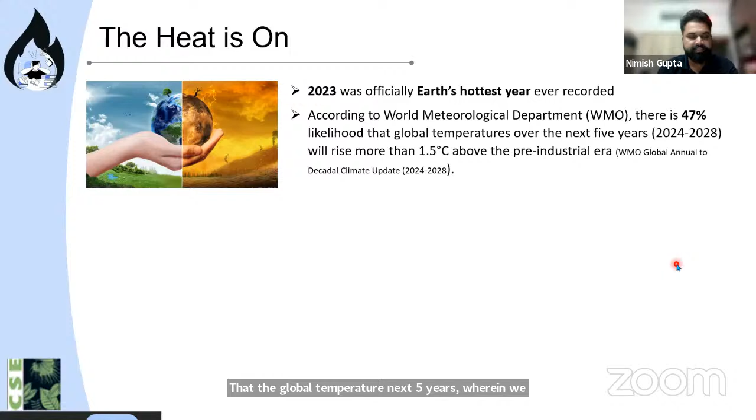Now, according to the World Meteorological Department, there is a 47% likelihood that the global temperature over the next 5 years, considering the current year as well, will actually rise more than 1.5 degrees Celsius above the pre-industrial era. And the heat waves we have been experiencing have been more frequent these days, plus the intensity has increased. So after 2030, it is estimated that around 160 to 200 million Indians would be exposed to extreme heat every year.

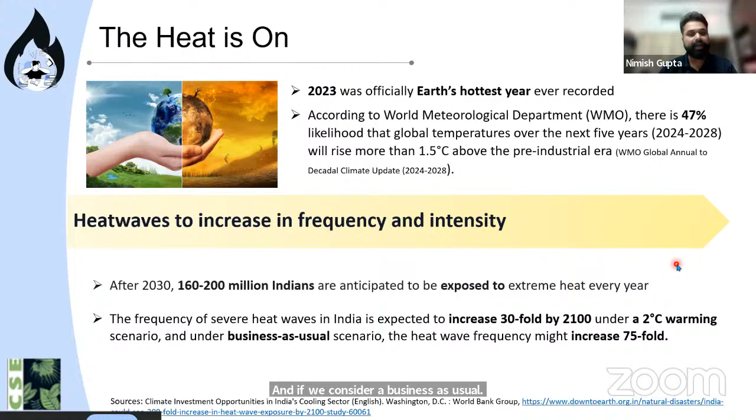And the frequency of these severe heat waves in India is expected to increase by around 30 folds by the year 2100 if a 2-degree warming scenario occurs. And if we consider a business-as-usual scenario, the heat wave frequency might increase by 75 folds. Now, extreme heat is actually here to stay.

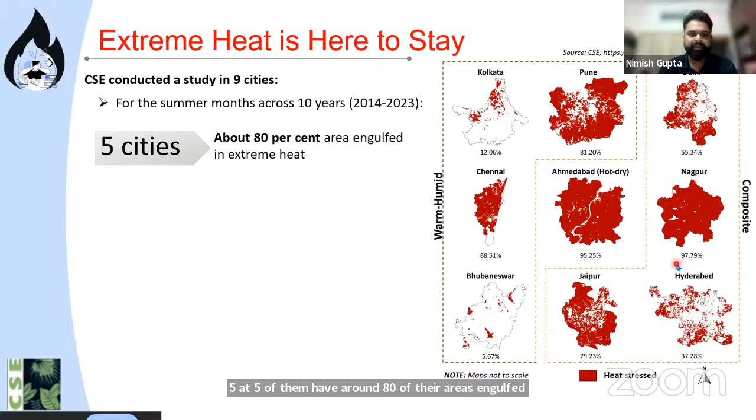So CSE actually conducted a 9-cities analysis wherein we considered the summer months for the past 10 years. What we understood is that out of these 9 cities, five of them have around 80% of their areas engulfed under extreme heat. With these areas identified, we looked at the number of schools in each of these cities: Delhi has 5,691 schools, Jaipur has 9,247 schools, and Kolkata has 6,229 schools. Most of these schools would definitely lie amongst these heat-stressed areas, and the number of students affected or under heat stress are also in millions.

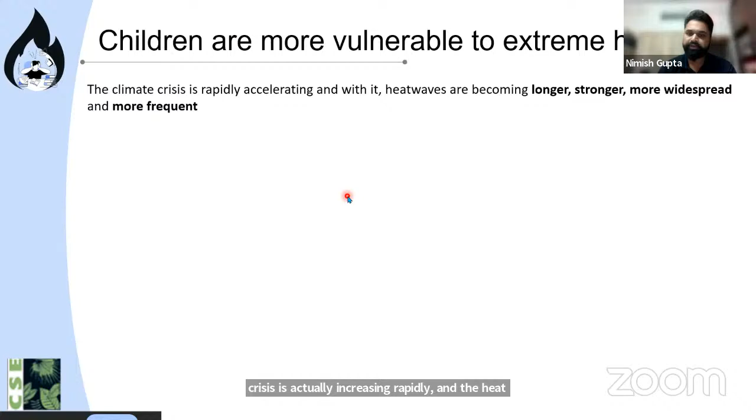So this actually impacts the health and well-being of these students. Now, children are more vulnerable. The climate crisis is increasing rapidly, and heat waves have now become longer, stronger, more widespread, and more frequent. When we talk about UNICEF's definition, a heat wave is a period wherein 3 days or more experience maximum temperature each day in the top 10% of the 15-day average. These definitions actually vary across different organizations. In India, it's something different, which I'll talk about in later slides.

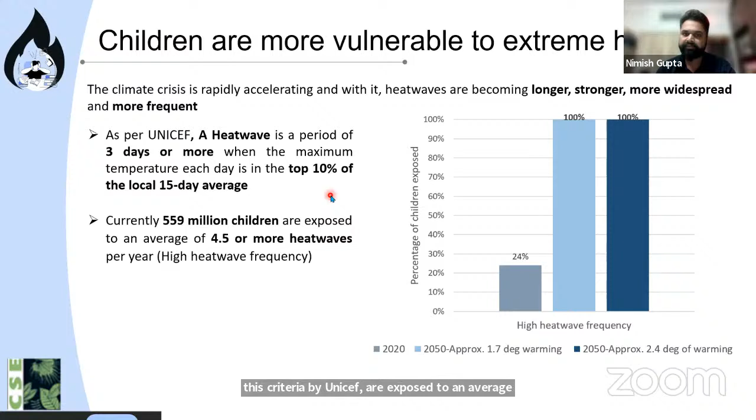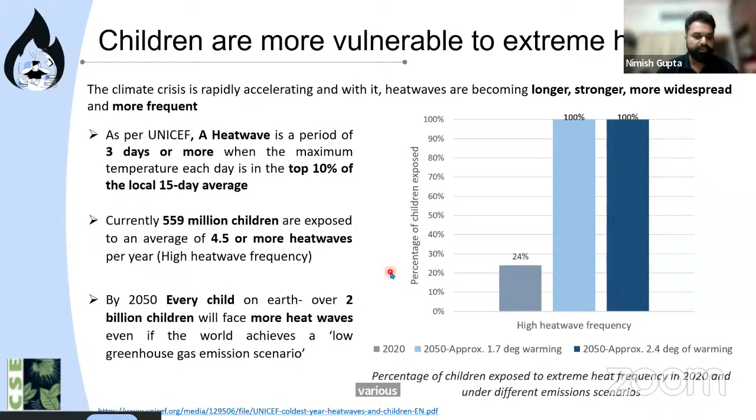So at present, around 559 million children, based on this UNICEF criteria, are exposed to an average of 4.5 or more heatwaves per year. And it is expected that by 2050, in any scenario—whether 1.7 degree warming or 2.4 degree warming—almost 100% of children, which is around 2 billion children, will face more and more heat, even in the low greenhouse gas emission scenario, as we mentioned.

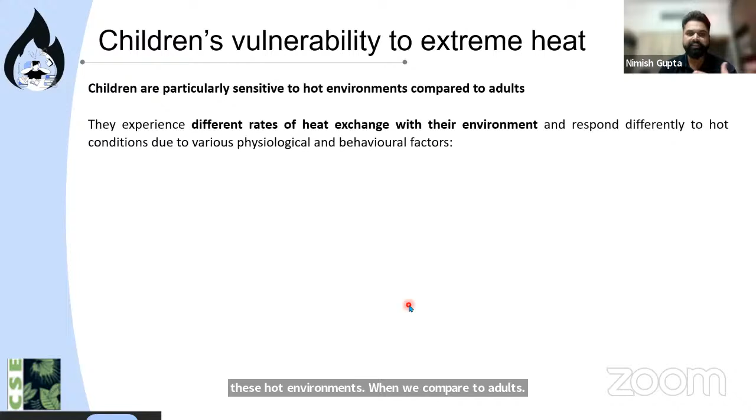Children are actually very sensitive to these hot environments when we compare to adults, as they have different rate of heat exchange with the environment, and they respond very differently to hot conditions due to their physiological as well as their behavioral factors.

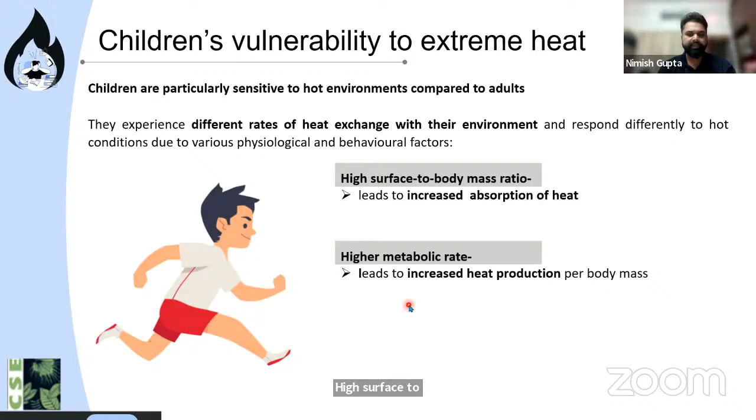Some of the factors are high surface to body mass ratio, which leads to increased absorption of heat. Their metabolic rate is higher, which results in increased production of heat per body mass, and inferior thermoregulation. Their sweat glands are underdeveloped at that point of time, and they have lower sweat rate, so they cannot regulate body temperature, which results in lower evaporative heat exchange.

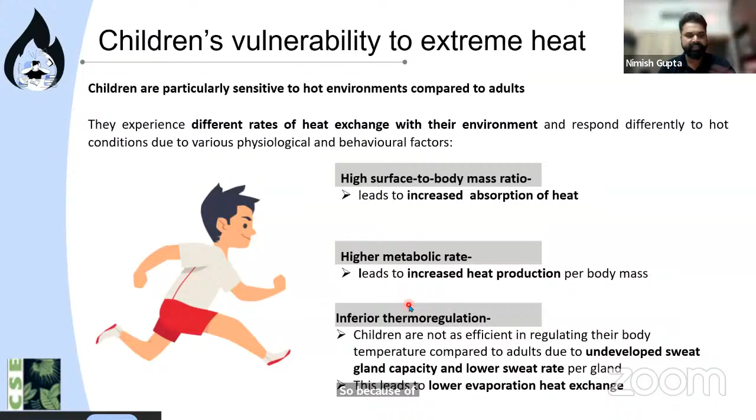The height of children is closer to the ground, which makes them more susceptible to thermal impact of surface temperatures. In terms of skin, children's skin is more sensitive compared to adults, which makes them more vulnerable to direct exposure to sun.

In terms of physical activity, children are more engaged in all physical activities, like playing sports or running around the fields and different sports, which results in higher metabolic heat production.

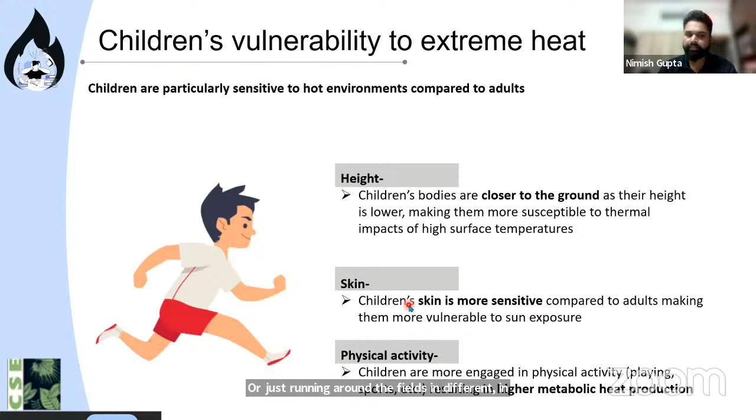A prolonged exposure may put children at greater risk, and failure to remove this excess heat could affect them in terms of health as well as behavior. In terms of health, they can face dehydration, high body temperatures, rapid heartbeat, cramps, severe headaches. In terms of learning, they have slower cognitive function and impaired concentration.

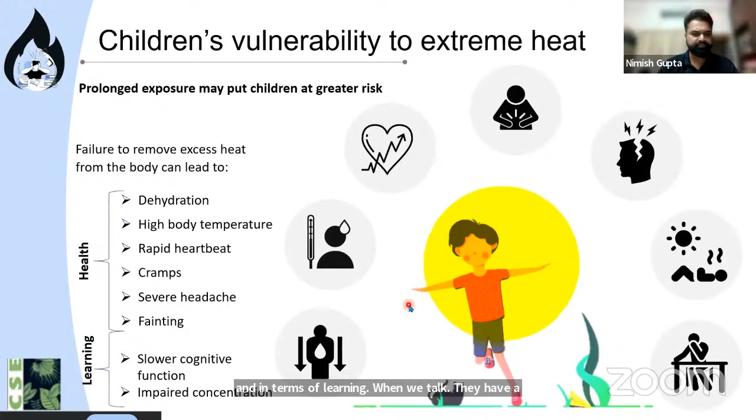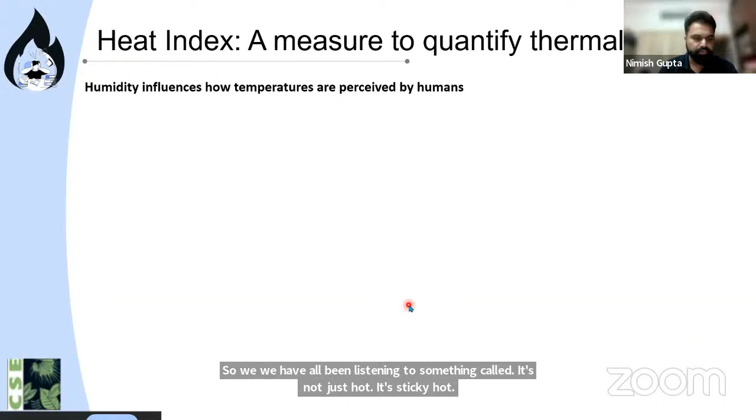There is another way where it's not just the temperature, it's the humidity as well. We have all been listening to the phrase 'it's not just hot, it's sticky hot,' which means that humidity plays a crucial role in defining thermal comfort.

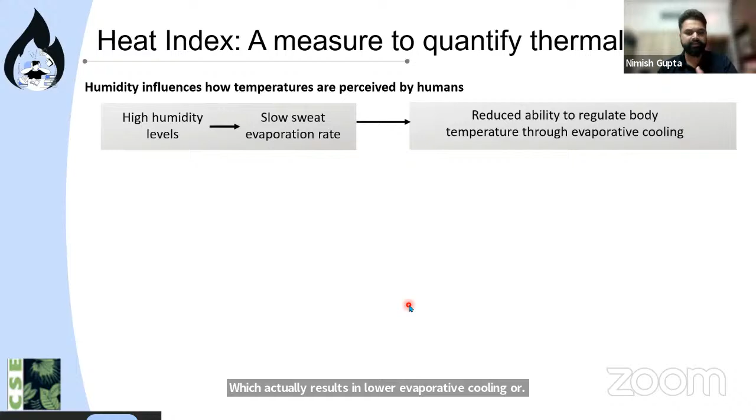When we have higher humidity levels, the atmosphere around us is saturated with water vapor, which doesn't allow our skin to sweat, resulting in lower evaporative cooling, and we start having thermal discomfort. The heat index integrates air temperature and relative humidity to estimate the human perceived equivalent temperature.

On your mobile phones, you must have seen that the temperature is 35 degrees Celsius, but you see another term called real feel temperature. That real feel temperature incorporates a couple more parameters, like humidity and wind speed, and tells you what the temperature is actually perceived as.

These are different heat ranges which correspond to various cautions provided to humans. So 27 to 32 is caution, then extreme caution, danger, and extreme danger. With each category, the health impacts become worse.

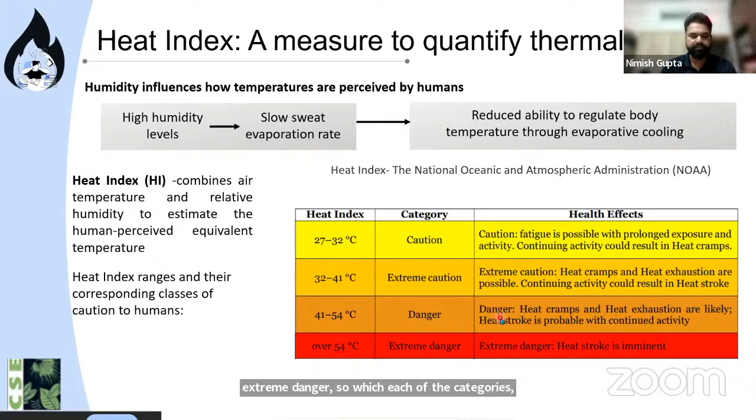CSE analyzed this heat index particularly for Delhi and other cities. I'm just presenting it for Delhi. We have done a 10-year analysis for the summer months, basically from May to September. Out of these, May to June are usually the vacation months, and July to September are the working months.

Overall, for summarization, nearly every year there were at least 10 days per month classified as extreme caution days. The number of extreme caution days over July, August, and September varied from 42 to 70 days per year for the 10-year analysis.

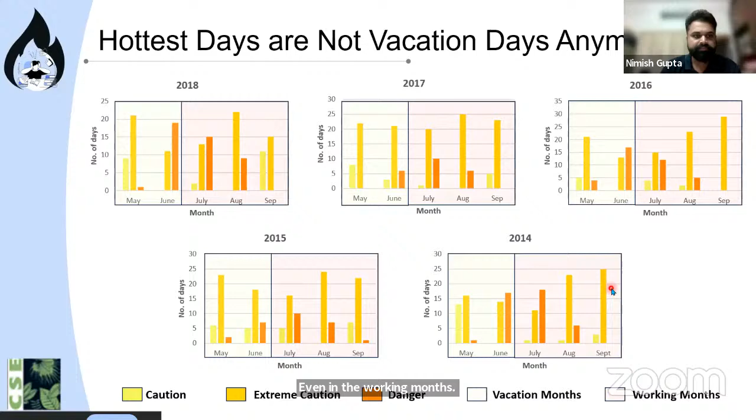Now, what CSE has identified, as Sugit told, we have identified multiple stages of discomfort at school. This could be while commuting from home to school, at school, in the classroom, and when commuting back from school to home. We'll go through these categories one by one and understand the probable impacts of heat.

The first one is in terms of commute. Seven different schools from Delhi NCR were selected by CSE to investigate the issue of heat. There is a criteria where if the home is within a 10-kilometer radius, that particular student's profile would be rated or given higher points when getting selected for that school, particularly in the admission criteria.

So what we did is we considered these schools, and a 10-kilometer buffer from these schools, and we assume that the average trip length, from where the bus picks up the first student to reaching school, is approximately one hour, or maybe slightly less or slightly more.

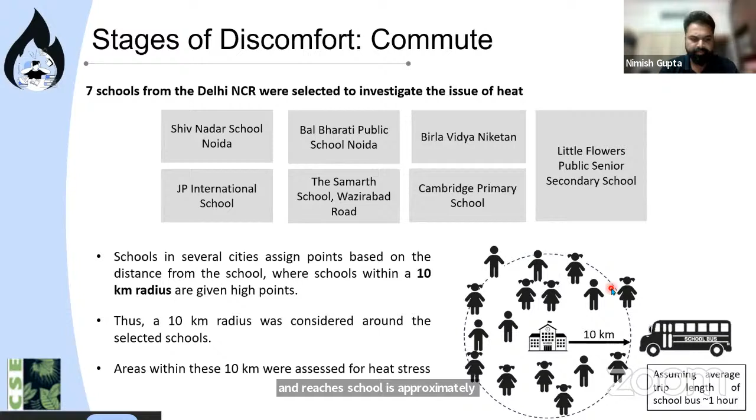So how did we identify this? We took surface temperatures for various years, like 10 years, from satellite data, and extracted the built-up area from land use maps. Then we took areas wherein the temperatures were more than 45 degrees Celsius. The surface temperature, please mind, not the air temperature - surface temperature is what you feel when you touch the surface.

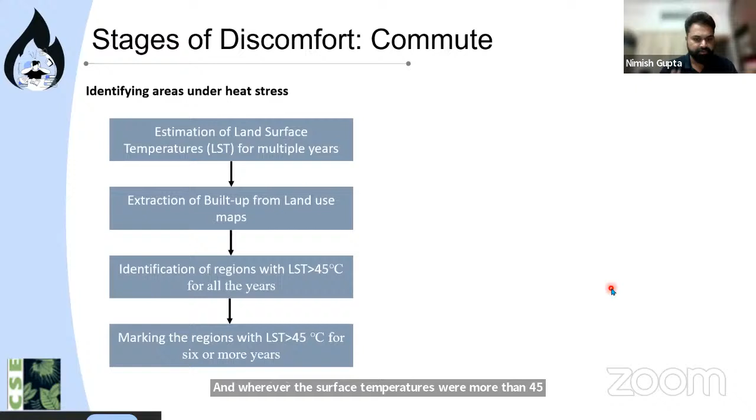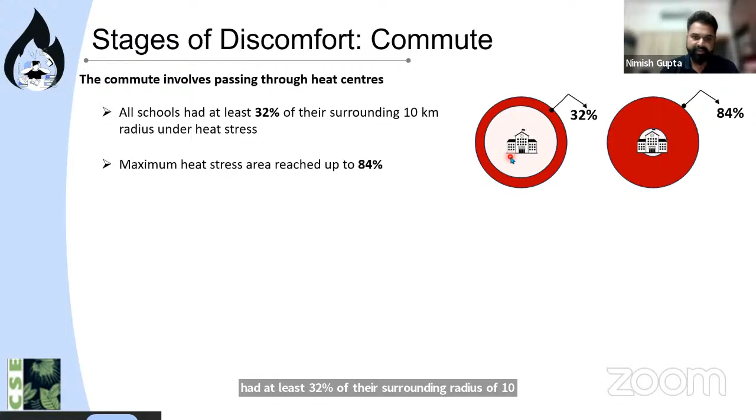Wherever the surface temperatures were more than 45 degrees Celsius recurrently for 6 or more years out of the 10-year analysis, those pixels were identified as heat stressed areas. This analysis was performed for these 7 schools, and it was identified that all of the schools had at least 32% of their surrounding 10 kilometer radius under heat stress, going up to 84% in the maximum heat stressed areas.

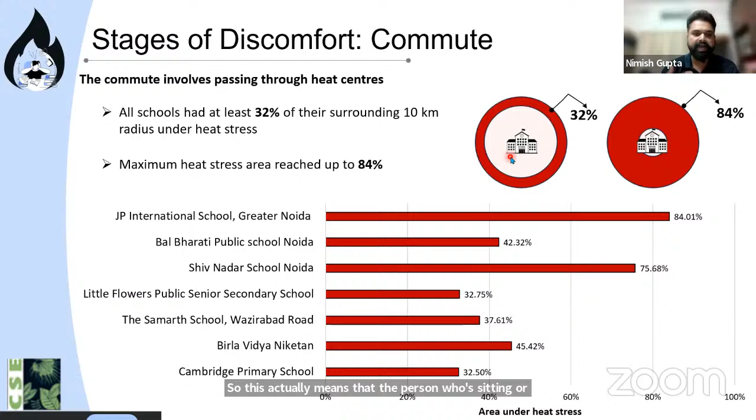This means that the first student who gets into the bus would be experiencing higher and higher heat throughout their journey.

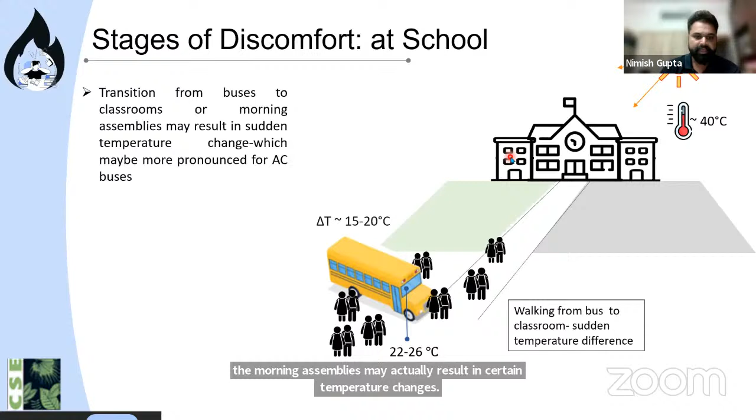Now the other stage is at the school. The transition from bus to classroom, or from morning assemblies, may result in sudden temperature changes, which may be more pronounced when using air conditioned buses. This could be a difference of 15 to 20 degrees, creating a phenomenon called thermal shock.

Some of the issues related to thermal shock are prickly heat, heat related swellings, heat cramps, exhaustion, heat stroke, nauseous feeling, and vomiting. These are some of the issues caused because of thermal shock.

In other outdoor activities such as morning assemblies, there is direct sun exposure. We keep hearing that many students faint during morning assemblies in summers. Also, during play period, if they move from AC classrooms to outdoors, or even from non-AC classrooms to more sun-exposed outdoor areas, it again creates a problem.

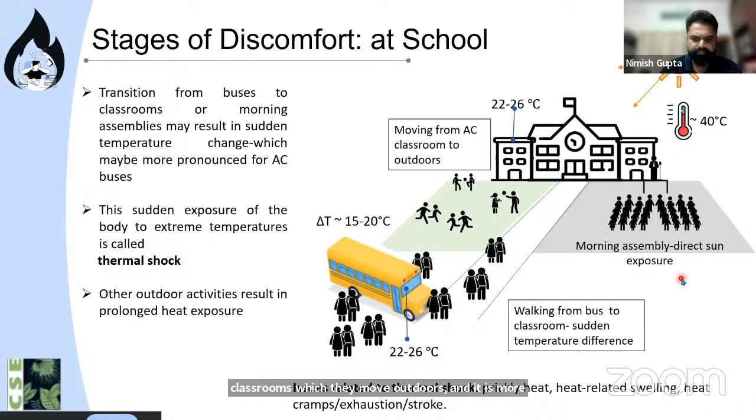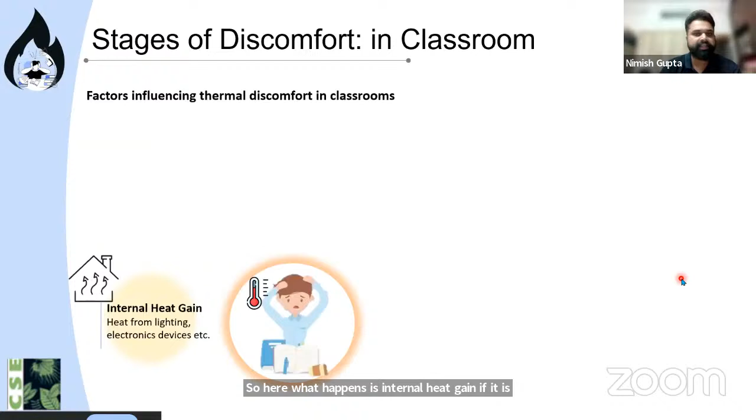Then another discomfort stage is in the classroom. Here, internal heat gain can be higher in terms of heat from lighting or various electronic devices. There's also external heat gain, wherein the building absorbs heat during the day and keeps increasing the inside temperature if the design is not adequate.

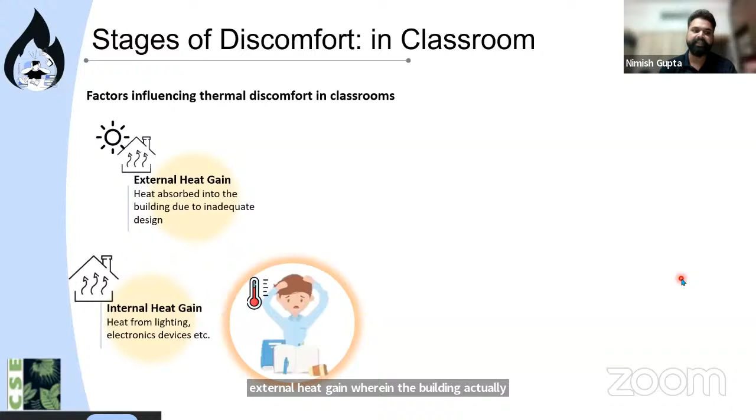If student density is higher, the ambient temperature and humidity level start increasing and it starts to feel more uncomfortable. Consider yourself in a room that is more congested with people - we start feeling discomfort in terms of breathing as well as temperature.

Inadequate ventilation leads to poor air quality, with continuous emission of CO2 from humans as well - it also creates an issue.

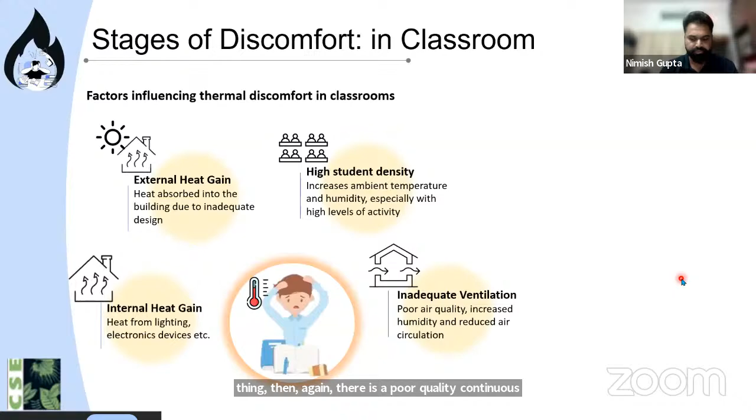According to National Education Policy 2020, classrooms must maintain an optimal student to classroom ratio, which varies with different areas, climatic conditions, and classroom size. As per the Unified District Information System for Education (UDISE) 2023, around 70,000 government schools across India have a slightly higher student-classroom ratio.

The accumulated heat in the classroom needs to be flushed out through adequate ventilation, in terms of electric fans - Sugit will be talking more about the solution criteria for these discomforts. Also, 15% of government schools in India do not have functional electricity connections, which creates even more issues.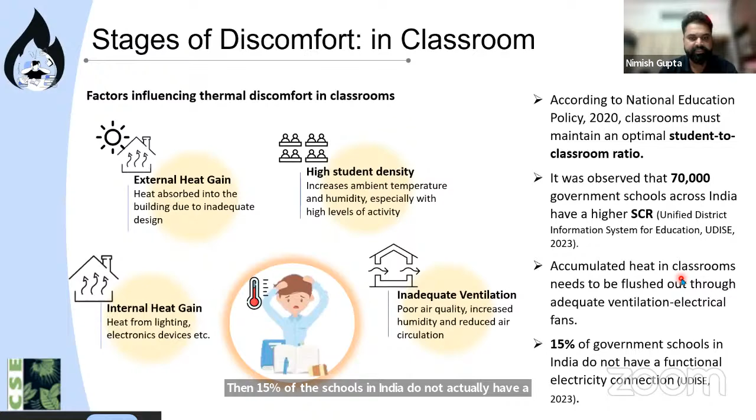There was an analysis based on a questionnaire filled by teachers across various Indian cities. Around 7 Indian cities were considered, and more than 300 teachers filled this form. They observed that 67% of students actually returned home earlier - at least around 10 students per week returned home earlier due to heat-related illnesses.

Teachers reported that fatigue was one of the most common heat-related issues noticed in students, followed by restlessness and dehydration. Students were also observed to be slower in work and were distracted in the classroom because of this heat.

Further, most of the teachers actually reported that tiredness and heavy sweating was the most common complaint from the students while they were in class, and a significant number of students also exhibited fainting, weakness, as well as headache.

So now I would request Miss Priti Arun. She's from Cambridge School, based in New Friends Colony, New Delhi. Ma'am, would you please share some impacts or examples of what you're actually facing in your school?

Thank you, Nimish. In terms of the discomforts that students are facing, it totally coincides with what you have spoken about. I think when Sugeet is talking about the solutions, that's the time when I can probably contribute a little more. But right now, the idea is that there are very few fans. Even if there are about 4 fans in every classroom, the effect of the fan is not felt very much by every student in the class. So these kind of things are there, and of course the classrooms are not air conditioned. Even if they were air conditioned, I don't know how much it would help in dead dry heat. So I think most of the schools would agree with what you have shown over here. So over to you, Sugeet.

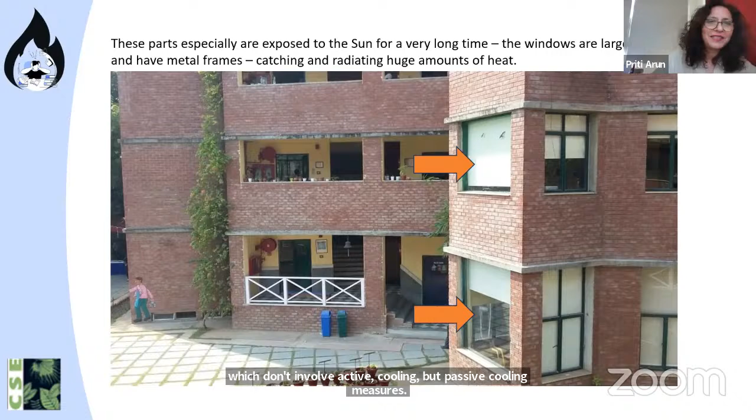So over to you, Sugeet. If there's anything I can speak later, it would be great, but right now I think you would be best. Sure, thanks a lot, Ms. Priti, for sharing what's happening in schools and the kind of issues and tough decisions that schools have to make now.

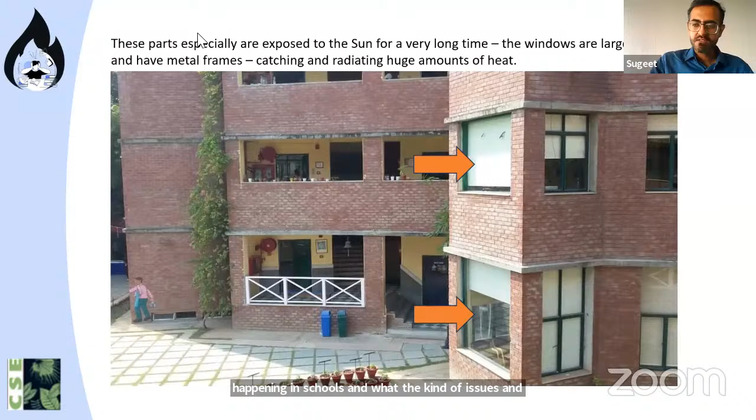So let me start by sharing a few of the solutions we found. For precautions for beating the heat, we analyzed a couple of heat action plans from some states and cities, and compiled a list of good practices. It's not that every city has taken every single thing into account, but we've compiled a list of what different heat action plans included.

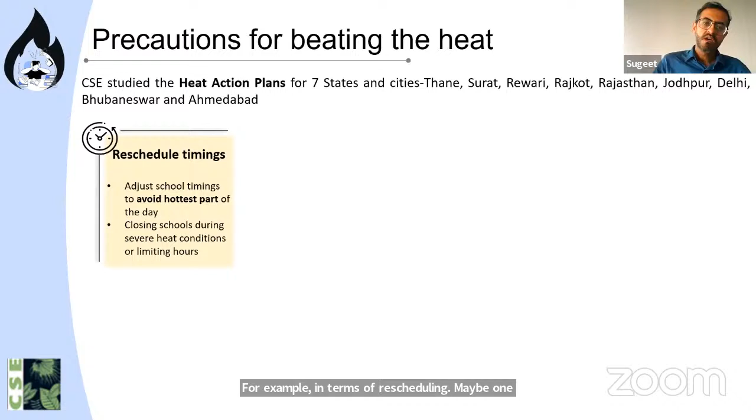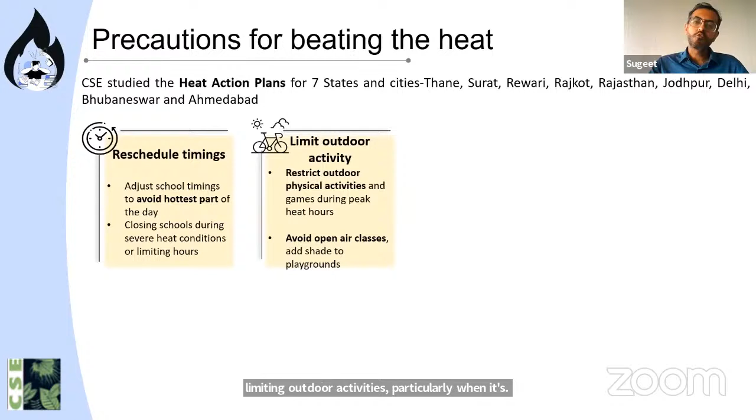In terms of rescheduling timing, one solution was to adjust school timings to avoid the hottest part of the day, closing schools during severe heat conditions or limiting hours, limiting outdoor activities particularly during peak heat hours, and avoiding open air classes, adding shade to playgrounds.

For hydrating and cooling, perhaps one of the most important things is to ensure adequate water supply in schools. Also something as simple as relaxing uniform norms can help, since we always talk about climate appropriate clothing.

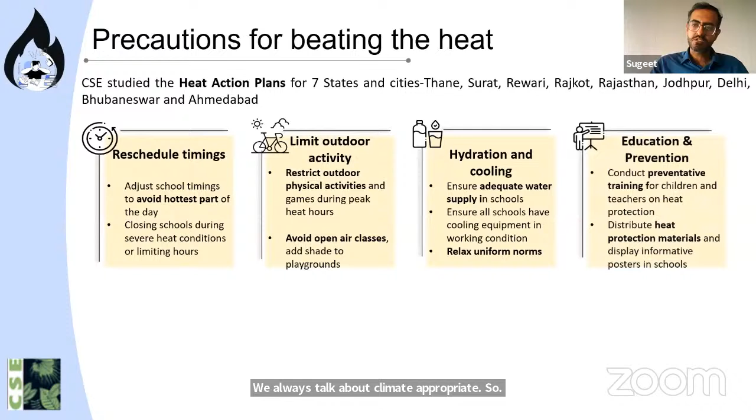In terms of education and prevention, heat protection materials and information can be displayed in schools, posters can be distributed, etc. For health and nutrition, having ORS, buttermilk, and other hydration methods can really help.

In terms of community engagement, parents need to be involved, and something like bulk messaging to alert parents about severe conditions will also help.

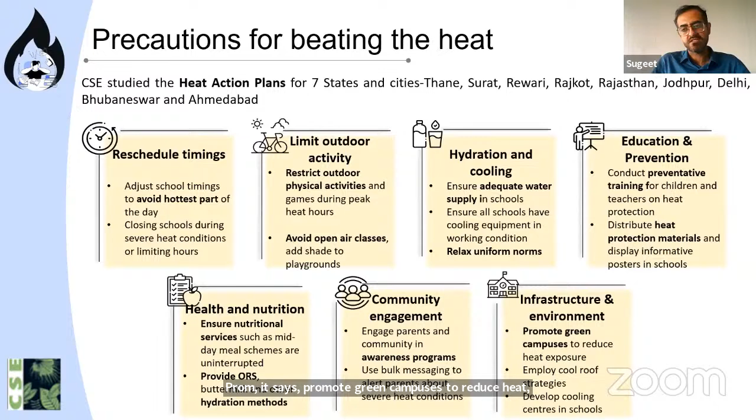The last aspect is infrastructure and environment: promoting green campuses to reduce heat exposure, employing cool roof strategies, and developing cooling centers in schools. This is what we will be talking about in detail.

So what interventions can schools take to beat the heat during commute? One of the simplest things a municipality or city can do is provide shading during commute, which we tested ourselves and found can reduce surface temperature by about 10 degrees centigrade, which is huge.

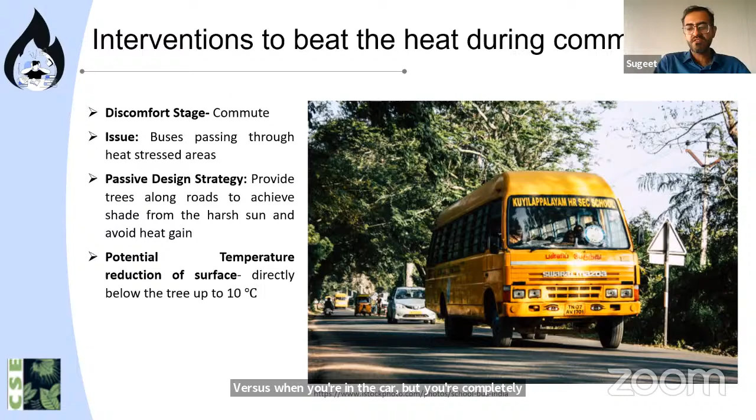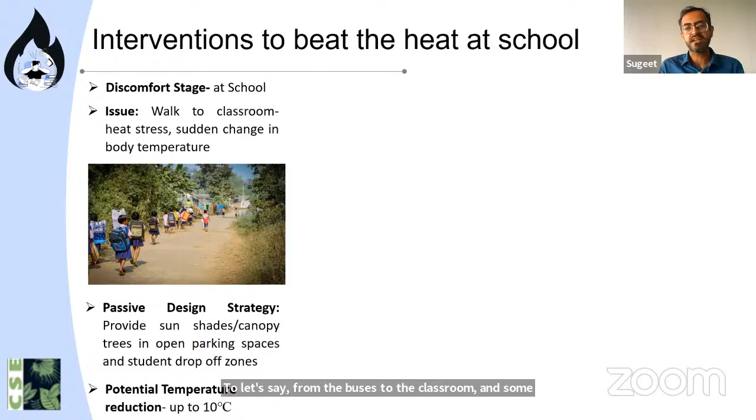Imagine yourself in a car in peak summer versus completely shaded—it makes a huge difference to thermal comfort perception, and this is something municipalities or cities can do. During school hours, the issue is walking from the buses to the classroom, and strategies like shading or a canopy of trees can help during this commute phase.

Something we overlook is the surface material used. We might use concrete, which absorbs a lot of heat, but we'd rather keep surfaces permeable. Then water can permeate into the ground, so direct sunlight gets absorbed less, and due to evaporation through permeable surfaces, both ambient air temperature and surface temperature become lower.

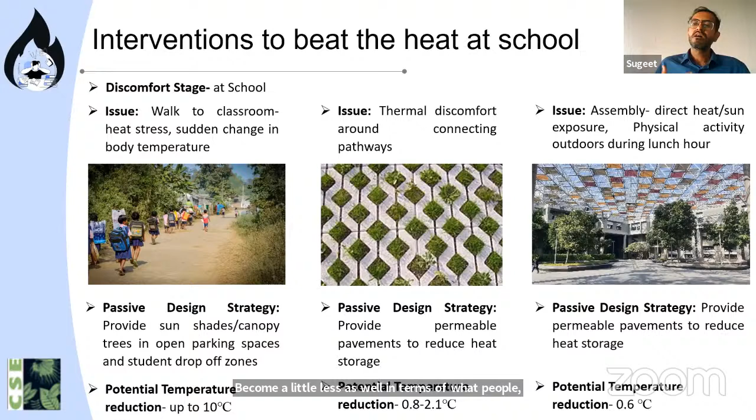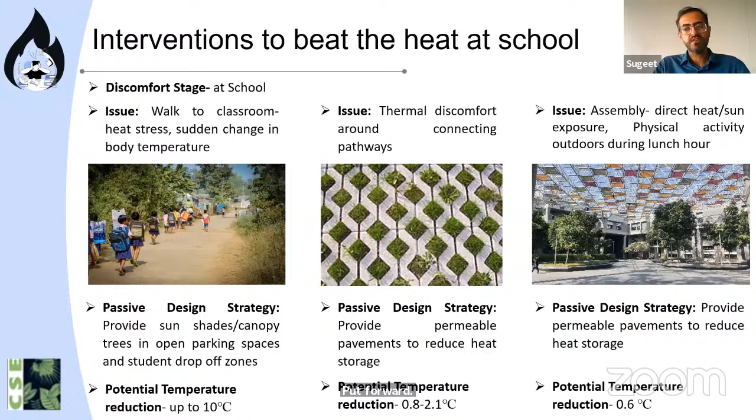For school assemblies, rather than happening in direct sun, lightweight sun shading devices could be put forward so these areas remain shaded during that time. Adequate ventilation is also a very simple thing schools can do.

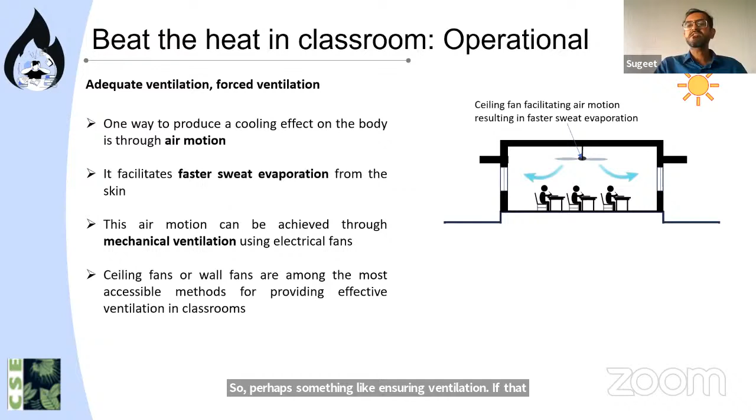Now, regarding what schools can do operationally: ensuring adequate ventilation, and if that's not available, forced ventilation through fans can work. Another very useful approach is the use of exhaust fans.

If there are 30 or 40 students inside a classroom, they produce a lot of heat themselves, and this heat rises. Using an exhaust fan can push all this hot air outside.

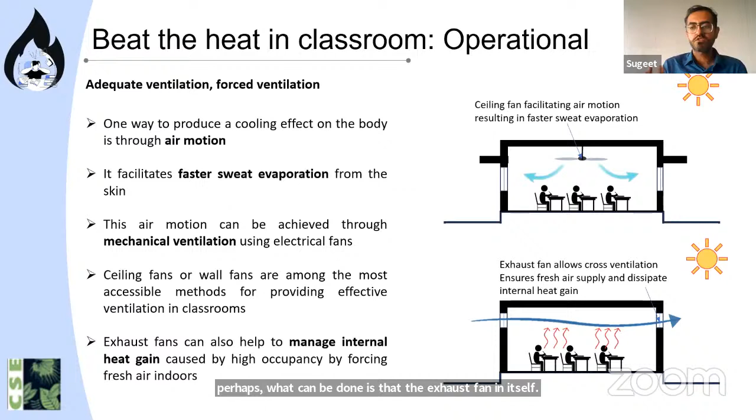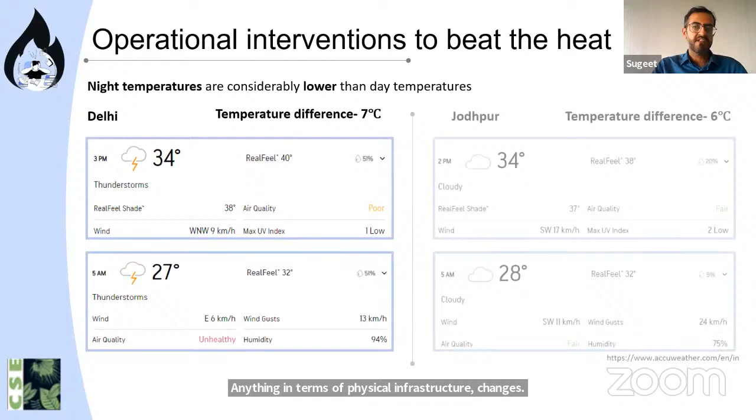In terms of more operational interventions that don't require physical infrastructure changes, let me show some data to clarify. It is predicted that today at 5 a.m., the nighttime temperature would be about 27 degrees in Delhi and 28 degrees in Jodhpur.

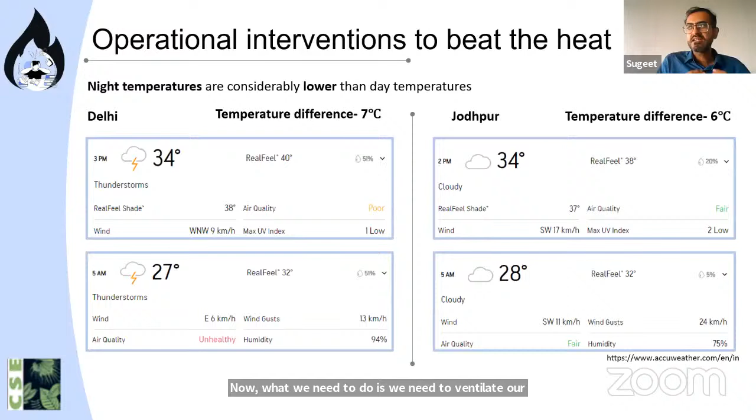Even though the daytime temperatures are at 34 degrees, the nighttime temperatures are much, much lower. What we need to do is ventilate our buildings so that they can actually store the cool that is available during the nighttime.

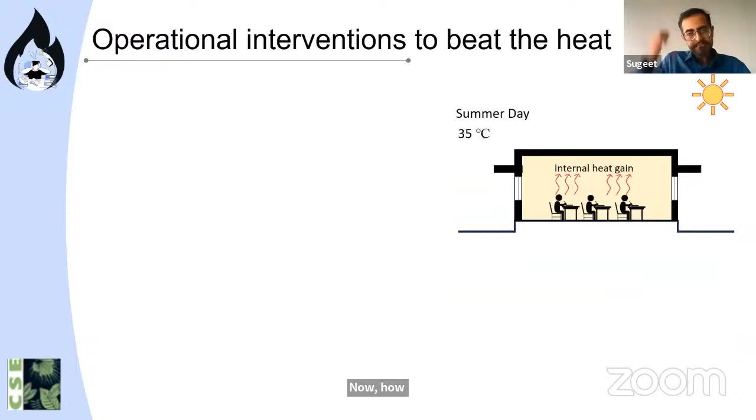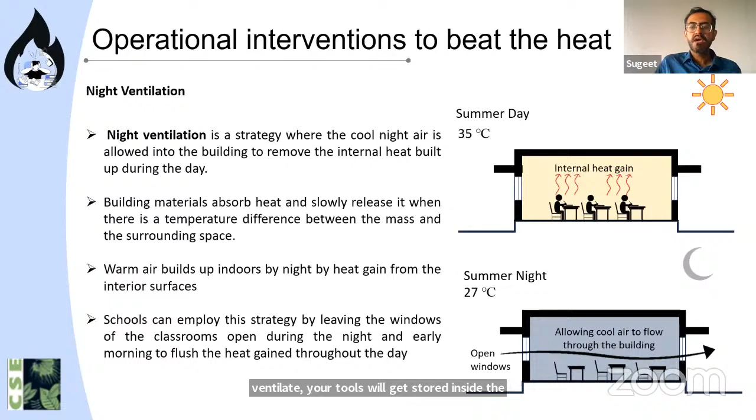Buildings gain a lot of heat during the daytime. If we're able to flush the building through and through with this cool nighttime air, the cool of the nighttime air will be absorbed by the building. Building surfaces such as bricks and concrete are heat absorbing materials, or cool absorbing materials if you want to reverse that. So if you're able to ventilate, the cool will get stored inside the building. These are very simple measures the school can take immediately, and you don't require any bit of infrastructure to do anything about it.

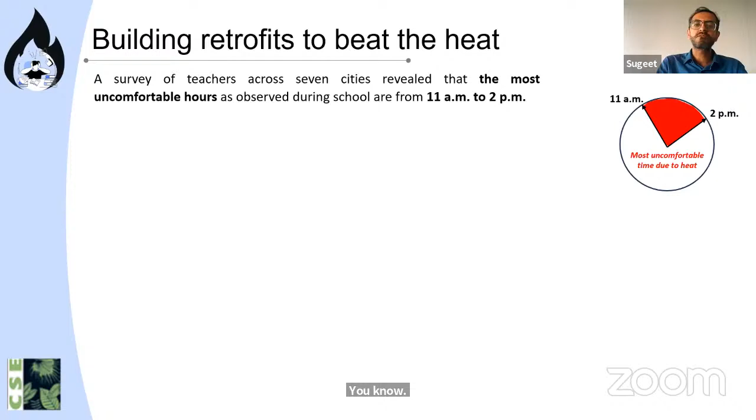In terms of building retrofits, what we found is that 11 a.m. to 2 p.m. was considered the most uncomfortable hours during school working hours. This is exactly the same time when the sun is almost overhead and there is a lot of direct heat entering the building.

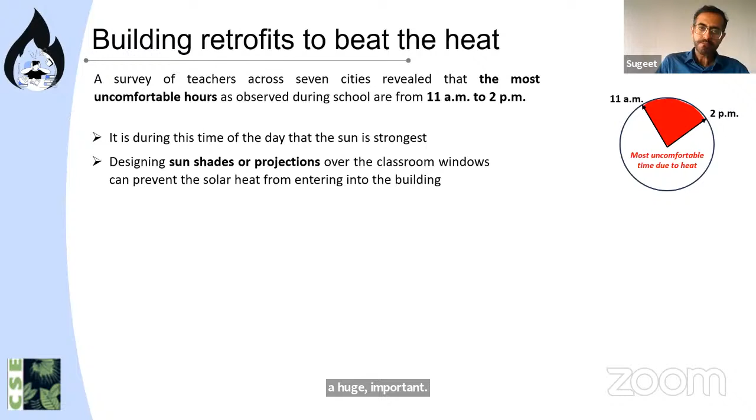Therefore, sun shading by itself can play a huge important part. Either your building can be designed that way, or it can be retrofitted with shading solutions that achieve this. A shaded window will have a much better chance of protecting you from direct sunlight than an unshaded window.

We did a small analysis of thermal comfort in different cities. Out of the 552 uncomfortable hours during July to September, we found that in Delhi, about 400 hours can be made comfortable just by using the correct type of shading device.

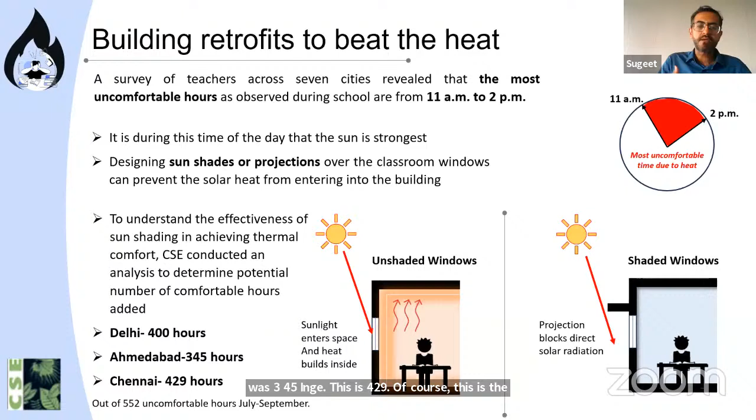In Ahmedabad, this was 345. In Chennai, this is 429. Of course, this is the higher range. Not every school, not every building will be able to achieve these hours, but it shows the potential that something as simple as using the correct sun shading device can reduce the uncomfortable hours by a huge margin.

Something as simple as sun shading devices can be retrofitted on the east and west. If you have a school facing east and west, then something like fins will be able to protect your building from heat coming in much better.

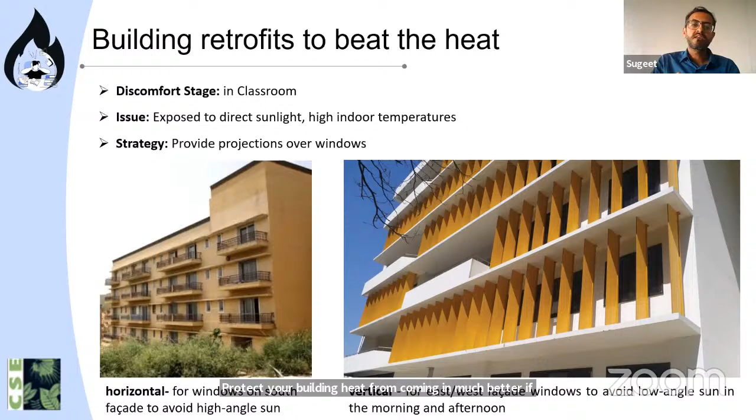If you're facing south, then something as simple as a chhajja will do the job very well. Another important thing is that most schools are just about 2, 3, or 4 stories, which means a large portion of them are affected by heat that comes not from the windows but actually from the roof.

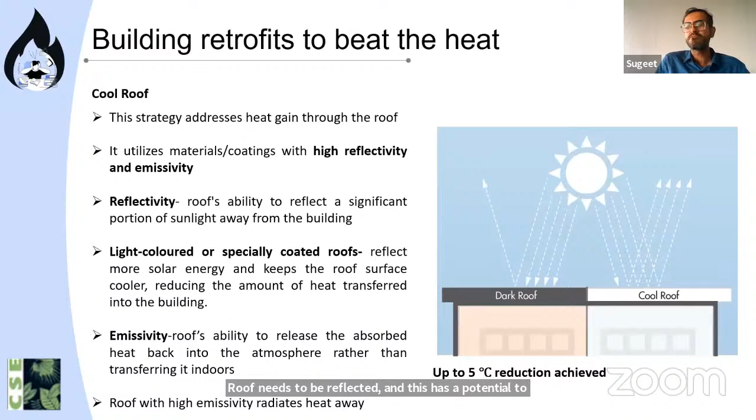Some simple strategies such as cool roofs, which means making your roof more reflective, can play a huge part. Most of the heat that falls on your roof needs to be reflected, and this has the potential to reduce temperatures inside the building, on the top floor, by about 5 degrees centigrade.

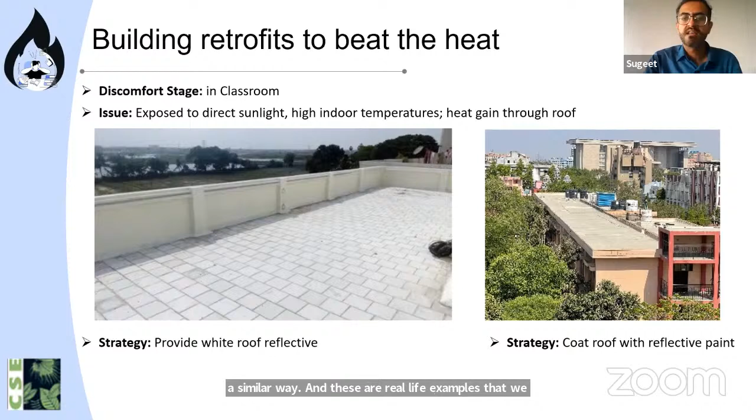These are some of the things schools can retrofit immediately. Using white shiny tiles over the roof, or some kind of reflective paint, can also work in a similar way. These are real life examples we've seen in schools that have been very effective in reducing the temperature.

Other things the school can do include something as simple as a green roof, which means having green spaces above their roofs. How does that work? First, it also reflects the heat, but because you have some amount of soil available over the rooftop, that also acts as an insulation between the heat and your building.

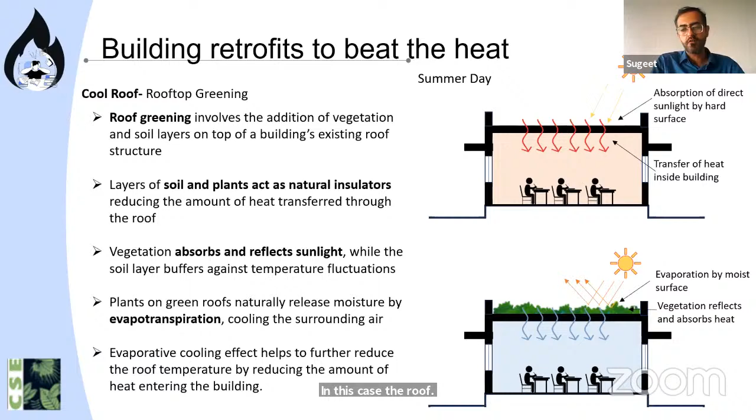The third way this works is that the plants themselves do something called evapotranspiration, which means they're able to suck water from the ground, in this case the roof, and use evaporation to cool down that surface. This is a very effective strategy schools can employ to cool down their surfaces.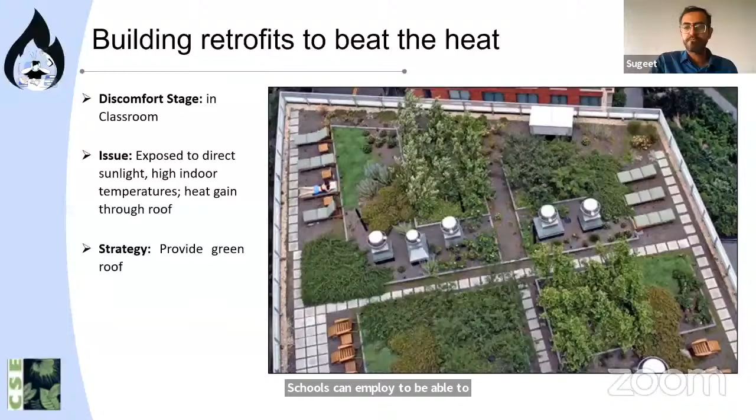This is also something schools can employ to teach their students and connect them better with the surrounding environment and nature.

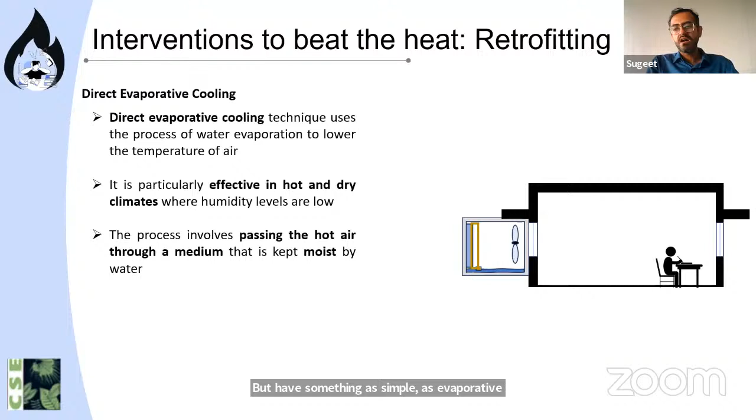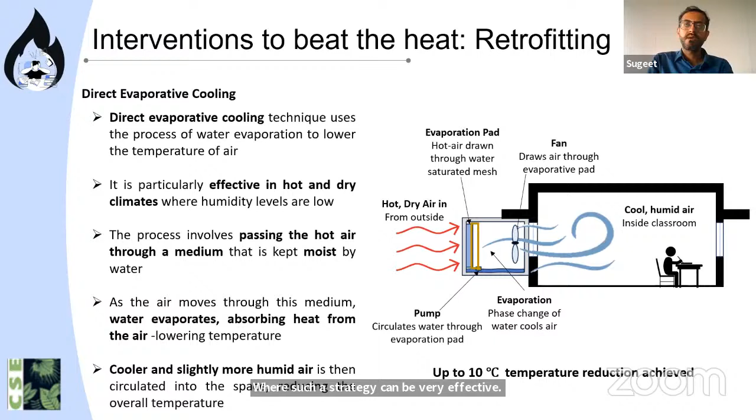Moving towards mechanical systems of retrofitting rather than air conditioning, something as simple as evaporative cooling can take place, wherein hot dry air is taken from outside through a wetted pad, and via a fan it is brought inside as cool and humid air. This works well in hot and dry climates, such as parts of Gujarat, Maharashtra, and Rajasthan, and even in Delhi during certain months like May and June, schools can employ this strategy.

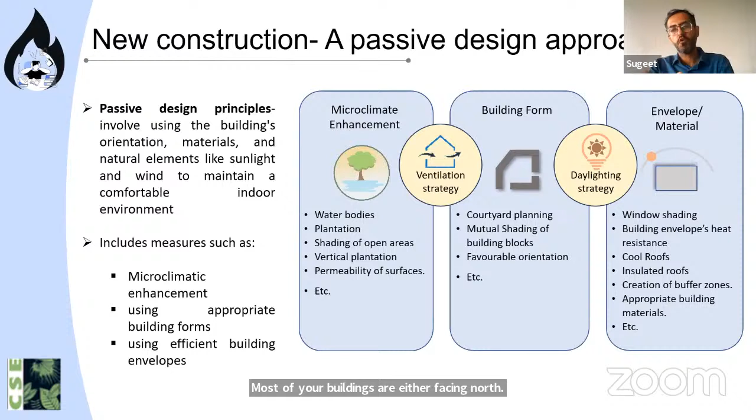If you're going for new construction, passive design approaches can be used, such as microclimate enhancement through plantation, building forms, courtyard planning, favorable orientation with buildings facing north or south, and using correct materials for roofs, windows, and walls. All of these need to be taken into account.

Ending with a few successful practices actually employed by different schools: a simple water bell system adopted by many schools in Kerala, where they ring a bell thrice a day to ensure children drink enough water. This becomes a behavioral change inculcated in students. This interesting initiative, after Kerala adopted it, was also adopted by some schools in Karnataka and Telangana. This is an example of Sri Swami Vivekanand School.

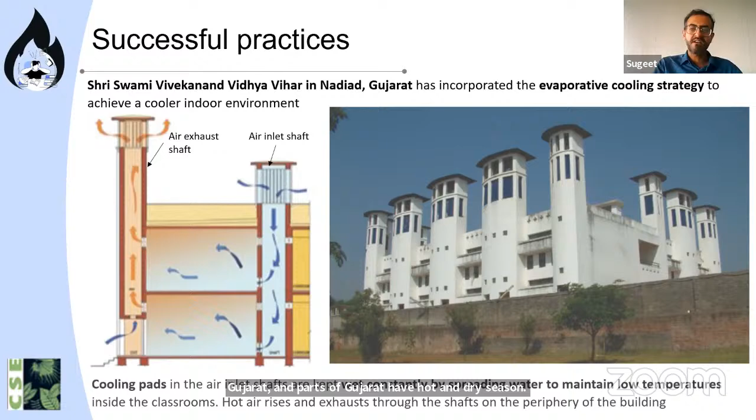They have employed evaporative cooling technology inside their building, so the whole school is designed this way. This is in Gujarat, and parts of Gujarat have a hot and dry season, so something like this works wonderfully well in such an area.

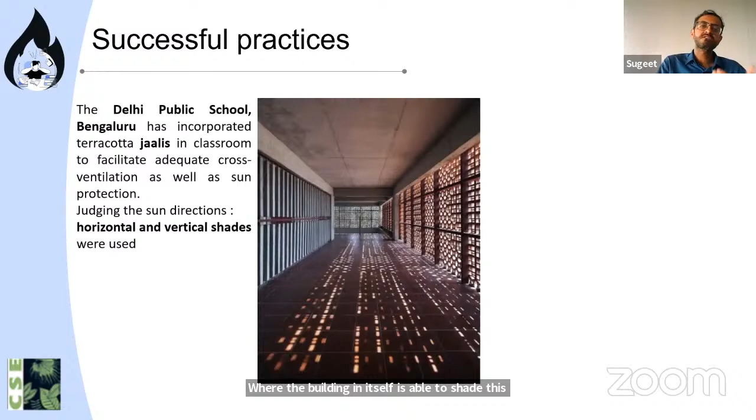Delhi Public School in Bangalore has incorporated terracotta jalis in classrooms to facilitate adequate cross ventilation. In a place like Bangalore, where air temperature is already pretty favorable, all you need to do is cut down the heat, and a jali works perfectly for that. It allows ventilation while cutting down the direct sunlight coming inside classrooms.

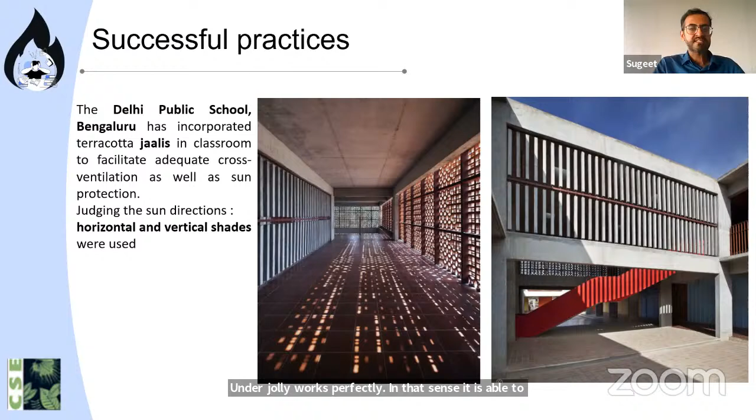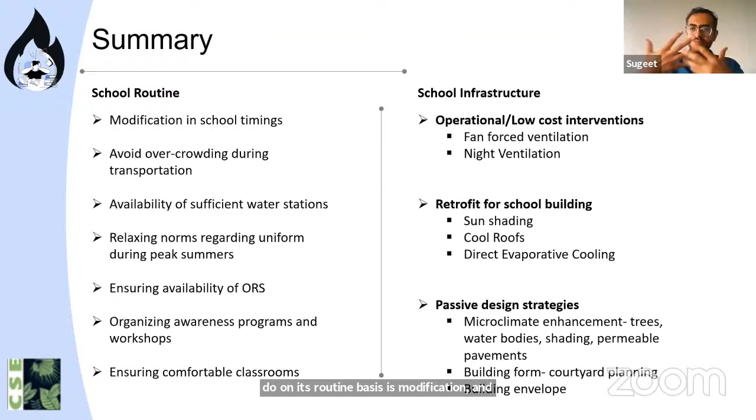In the end, let me summarize what schools can do on a routine basis: modify school timings during heat waves, avoid overcrowding during transportation, ensure sufficient water stations, relax uniform norms during peak summers, ensure availability of ORS, organize awareness programs and workshops, and ensure comfortable classrooms.

How to ensure comfortable classrooms? The easiest, low cost interventions would be fan-forced ventilation and night ventilation, where you purge cool air inside the classroom during nighttime. Retrofits on schools can include sun shading, cool roofs, or green roofs—either painting rooftops white, adding white tiles, having vegetation on roofs, or using direct evaporative cooling, particularly in hot and dry climates rather than humid ones. If building a new school, passive design strategies such as microclimate, building form, and building envelope can all be employed.

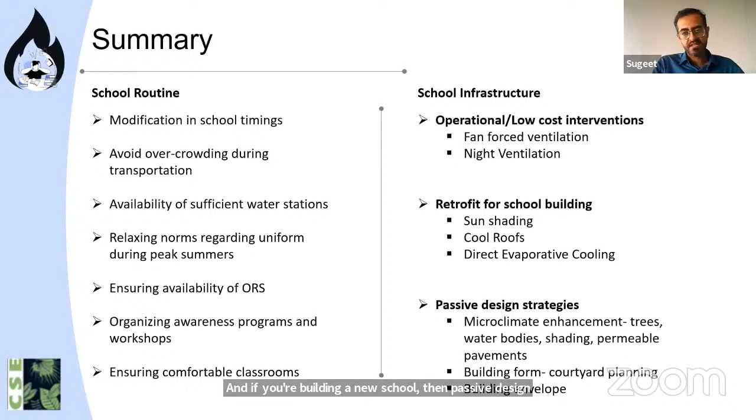With that, I'll hand it over to Tushita, who will take you through our Green Schools program. Over to you, Tushita.

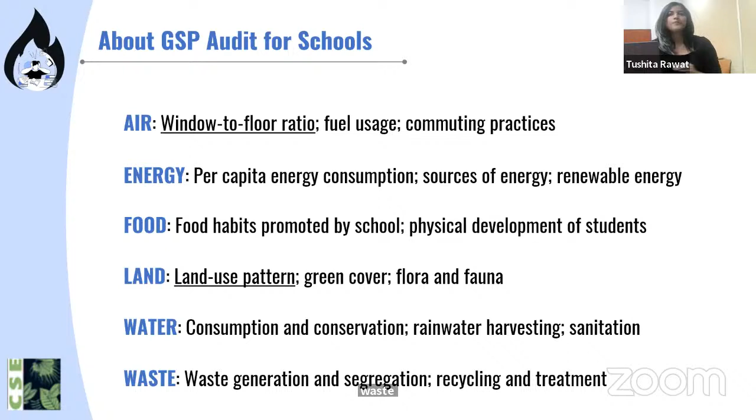So this is an overall picture of the audit. I would now like to come to the aspects that are connected to today's presentation, and then I will talk about the process a bit. If you're a school that's still not familiar with GSP, how can you enroll and how can you get started with the audit?

So talking about sustainable campuses, I would first like to talk about window to floor ratio and then land use pattern. Window to floor ratio is the ratio of area of openable windows in a classroom to the total area of the floor.

So imagine a typical classroom in your school and then imagine how much openable area is there. You don't have to count the door, just openable windows and ventilators that you can open, and that to the total area of the floor. So that ratio is called window to floor ratio.

It is a unit that indicates whether or not you have sufficient natural light and ventilation in your classroom. So there are two things it indicates, WFR or window to floor ratio: sufficient natural light and sufficient ventilation. We've already learned that too little and too much of it is a problem. So it should be in the perfect range. That's something window to floor ratio captures, which is under the air section of the audit.

Now, how do we do it? The entire audit is student-led, which means students form teams, go around the campus and collect this data for us. Teachers act as facilitators. They help students whenever they're stuck, and also help put the data into our audit portal, which is online. But the main idea is that students should be on ground doing these hands-on activities, and calculating window to floor ratio is a perfect example of a hands-on activity in a mathematics class, let's say.

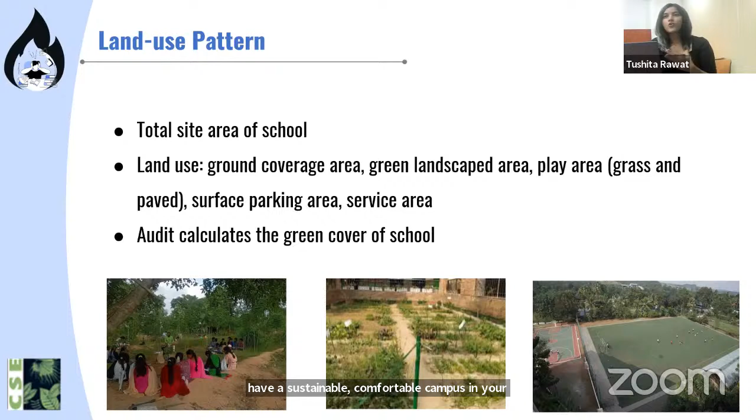Now coming to GSP audit, what it is and how you can enroll for it, so how you can measure where you stand. Could we go back to the previous slide? This is perfect timing because GSP audit is live once every year. It's an annual activity and we keep the audit open for 3 months in a year. It's not open around the year. You can register for GSP throughout the year, but the audit you can only participate in when it's live from our side.

So the audit for this year, 2024, went live on July 15 and closes on October 14. That means you have to provide us the data within this time period. If you need more information on this, you can go to www.greenschoolsprogram.org, which is our website, where you will find the registration link for GSP and also the audit login link.

I will quickly go over the process of GSP audit that a school has to go through.